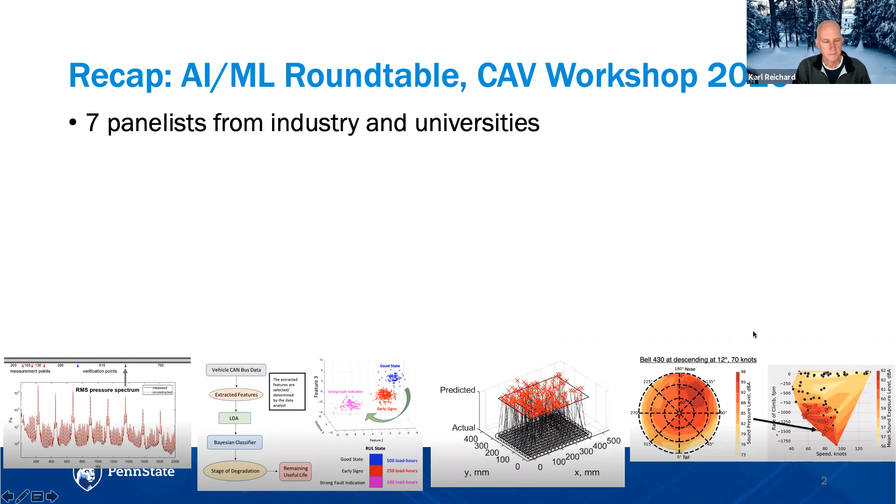Go ahead, Danny. Yeah, I can go from here if you want. So we had these panelists and we presented a lot of recent machine learning work on acoustic and vibration. Some of these are from our colleagues - the lower right is from Eric, and I'll get one from Dr. Dare, and also I think one is from Dr. Reichard here.

Anyways, we had almost unanimous consensus that we need to start a machine learning group, and we need to address some key challenges now in this field - that we want to incorporate physics and all these fancy data models to get a robust and explainable machine learning model that can be used robustly in industry.

This also connects to the questions that arise from this roundtable - questioning whether all these fancy data models are applicable to solve real problems in industry. In parallel, we also had discussions on what we should train or develop for the students to prepare them for industrial work, where we need them to get both the math and the hands-on skills and so on. This ends up with the essential needs that we identified.

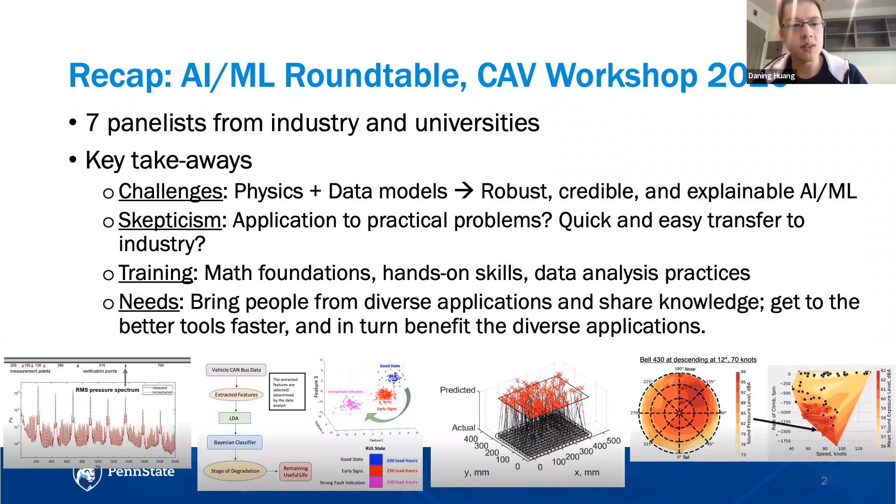As Karl said just now, we want to bring people from different applications in acoustics and vibration, and get people working together to solve problems that are probably challenging in real industrial scenarios, and solve them together.

And to do that, we will leverage a broad spectrum of machine learning methods, starting from the more conventional supervised learning to more recent network theoretic or operator theoretic methods, and also more advanced concepts like active or reinforcement learning and things like those. But in the end, we want to be able to solve the traditionally challenging problems in acoustics and vibration in realistic industrial scenarios.

Based on these motivations, we have listed our current research topics of interest, which range from reduced order modeling of very complex multidisciplinary systems to information fusion and decision making based on, for example, health monitoring systems. Of course, as our group grows, I'm sure our topics will continue to evolve and expand.

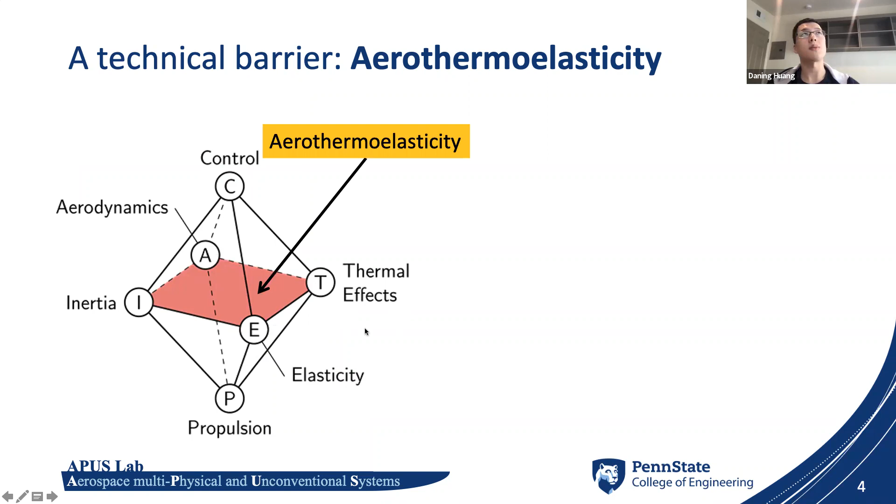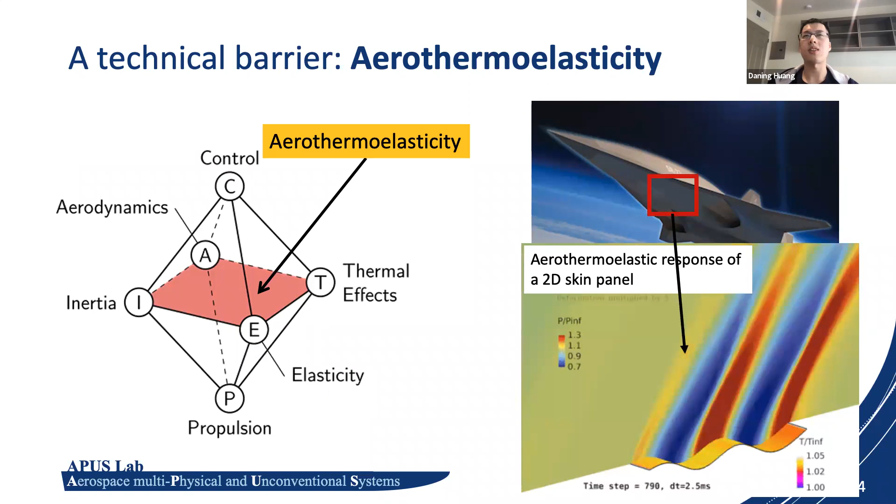Yeah, here's just one example of what might happen for aerothermal elastic behaviors. Here is the Lockheed Martin kind of design of the vehicles. If we look at the surface, just the skin panel for example, down in the lower surface, the panel might heat up and it might buckle and might enter some unstable behavior called flutter. And if this happens, it will be really, really dangerous because the structure might just break and the entire aircraft will crash.

So there comes our need for stronger and lighter structures. And here's a figure showing the thermal design considerations of the structure. For example, just now we are looking at the external skins.

So as we increase the cruise Mach number, we'll see that this structure will operate in the range of 1,000 to 1,500 K. I know the unit is K, so it's slightly more severe than Fahrenheit. You can imagine what would happen for a structure when it's like 1,000 K. It will be thermally expanded, and sometimes more severe behaviors on the material might happen.

And furthermore, if we look at the inlet for the engine, it's even more crazy. We are having temperatures that might reach 2,500 K. This is even maybe beyond the limit of some materials, the best materials that we have for the thermal environment.

And then what's the result for these thermal effects? Probably many of you know this X-15, this classical configuration that NASA has been playing with. It has been tested over a wide range of Mach numbers, and what people have seen is that there are so many destructions or malfunctions due to the thermal effect.

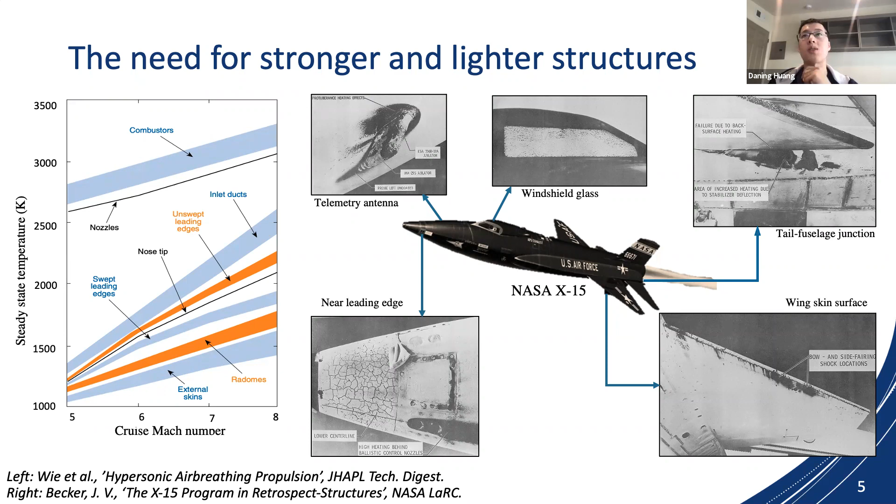So this is our basic challenge in the aerothermal elastic design of hypersonic structures. So then what are the challenging parts for the aerothermal elasticity? Well, first of all, we of course will have three components: the fluid, the thermal, and the structure part.

And the first part, the fluid part is apparently very challenging, as you might imagine. Here is one example of some recent work that I'm doing with the Sandia National Lab, where we try to analyze a control surface that's exposed to hypersonic flow.

And you can see there are many complex flow phenomena, like we have a shockwave boundary layer interaction at high speed. We have a boundary layer transition that's a totally different animal from the case of subsonic or supersonic flow. Besides these, we also have things like a real gas effect, where as the gas heats up, the molecules might dissociate and be chemically reacting. That adds a totally new dimension in the aerodynamic analysis in this process.

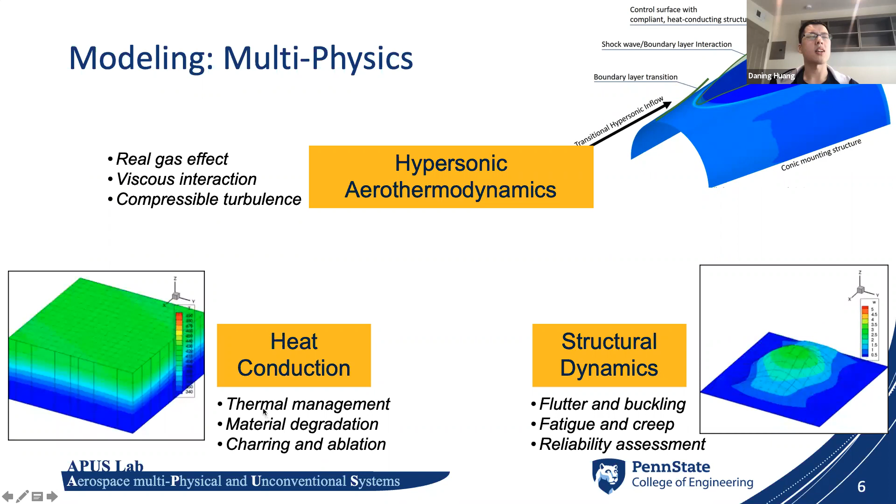And similarly, we are having different kinds of challenges in the other physical domains, which are themselves also quite challenging to tackle. Besides all these complex phenomena, we are also having this interaction between these physics. That way we have a complex multi-physics problem. Again, that would be rather challenging.

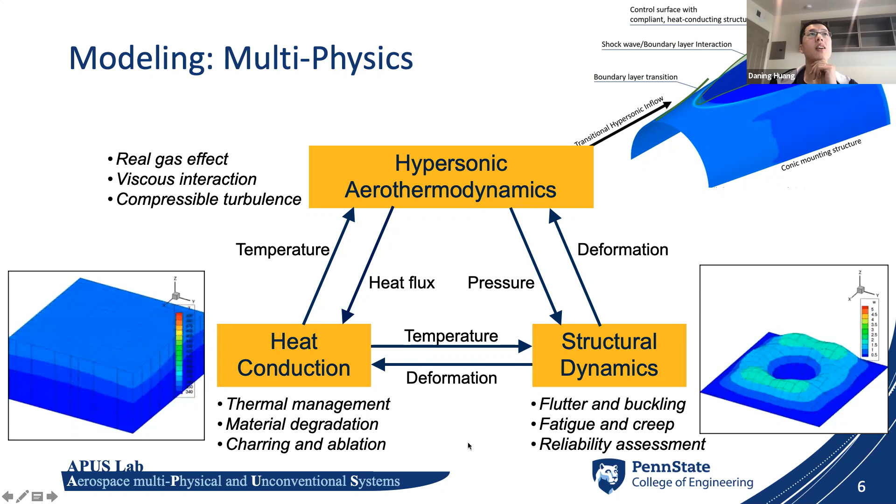Now, besides this multi-physics effect, we also have this issue of time scale disparity. What we mean by this is that for the three physical disciplines that we are talking about, they have very different characteristic times. And if you do numerical simulation, you probably know that if we do the simulation in the unsteady sense, then we need to determine the time step size depending on the characteristic time.

So for the fluid, our time step size needs to be like 1 millisecond. However, for the thermal case, we actually only need to do the simulation at a time step size of 1 second. However, for the hypersonic vehicle, we need to consider the entire flight mission, which might last for an hour or half an hour, which would correspond to like 1,000 seconds.

So this means that we need to resolve the fluids at a scale of 1 millisecond, and we need to do that for 1,000 seconds. And this really poses some intractable computational cost.

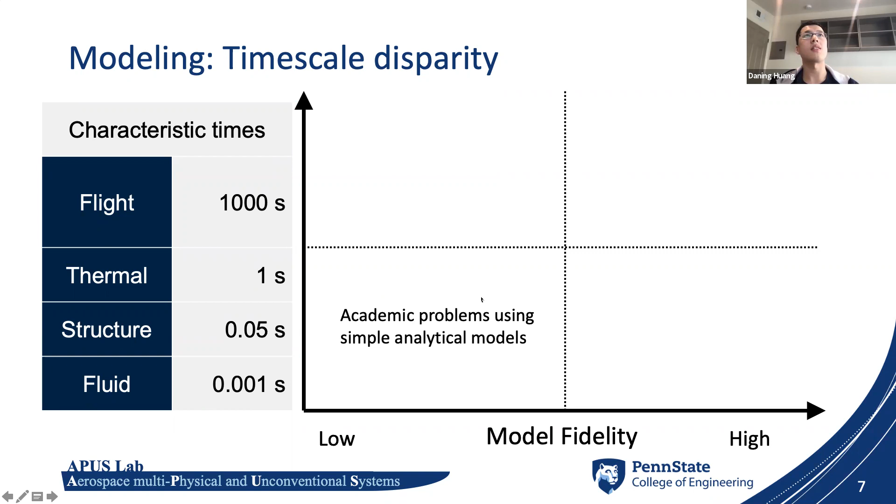And here is some just background on what people are trying to do. People might just use low fidelity models to do this long-term simulation, but this can lead to very wrong results, as was shown in some of the work 3 years ago.

Or we can do some very transient analysis, but we can never bring this up to a level of flight region. So here comes, if we really want to do this brute force simulation using high fidelity models over a very long time, then we'll have this challenge that we would need 1 million steps to resolve the time domain. But for each time step, since we have a very complex fluid problem, it will take a long time for each step. This will add up to weeks or months to do the simulation.

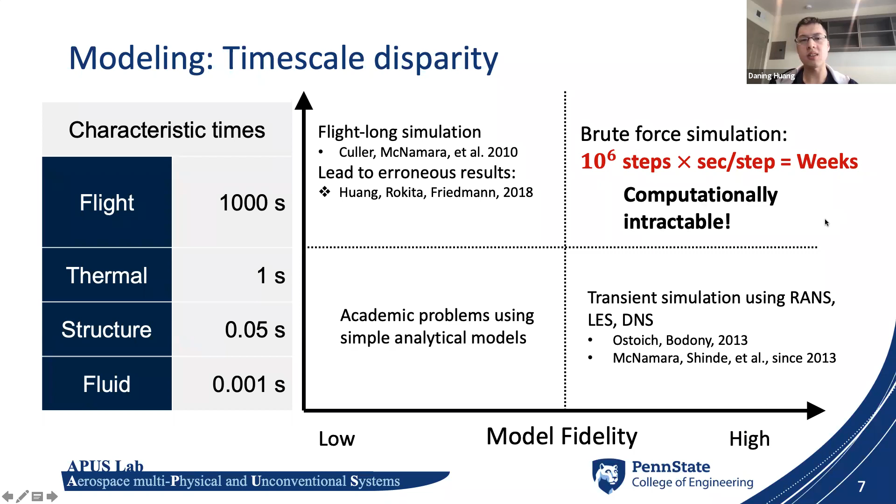So this is a basic challenge in the aerothermal elastic simulation, analysis, and design for hypersonic structures. So the natural thought would be we can somehow accelerate the aerothermal elastic simulation, so that we can perform the analysis faster, and hopefully design the hypersonic structure in a tractable computational cost.

So just now we identified that there are two components contributing to the computational cost. One is that we have too many time steps. The other is that we have too much computational cost for one step.

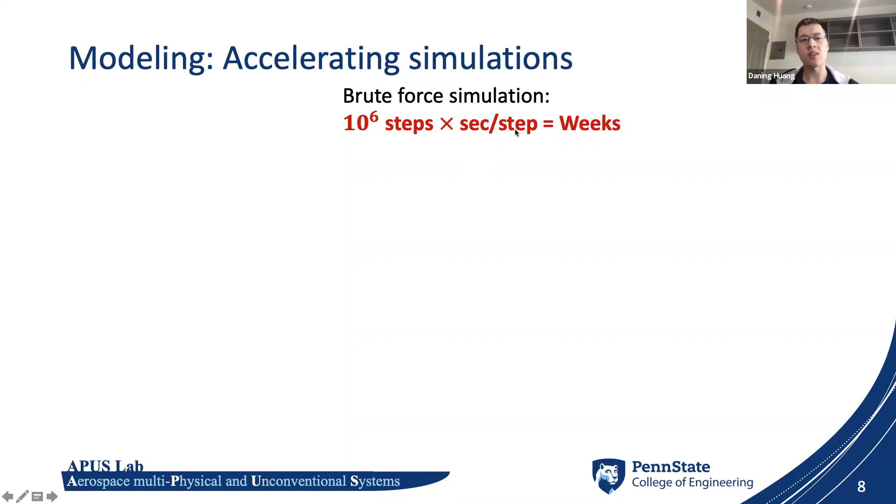People have been tackling these two sides separately. One is to use more efficient time step coupling schemes to reduce the number of time steps. The other is to use machine learning techniques to accelerate the computational cost for each step.

I'm not going to talk details about the left part, which is more on the numerical computation side. I'm happy to talk if you are an aeroelastician or work on FSI after the seminar. We'll mainly focus on the right part, on how we accelerate the computational cost of the fluid solver such that we can perform the simulation in a realistic time.

By acceleration, we mean accelerating from seconds or minutes down to milliseconds, like maybe 50 or 10 milliseconds.

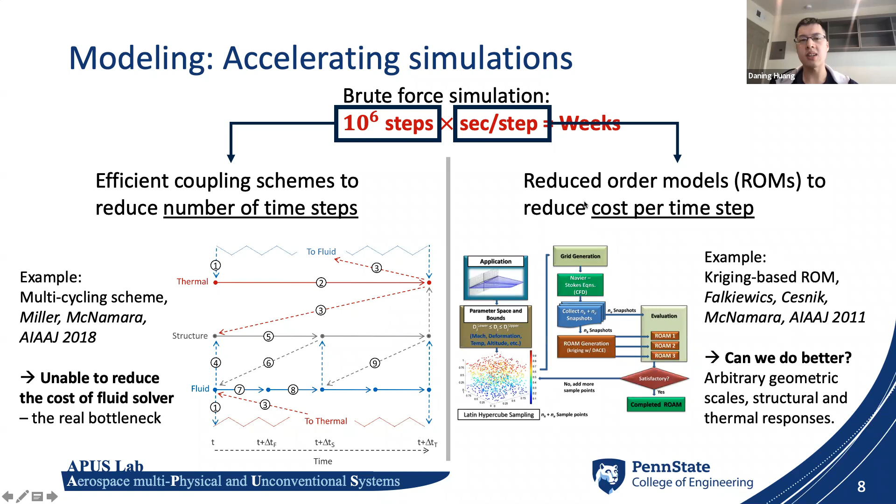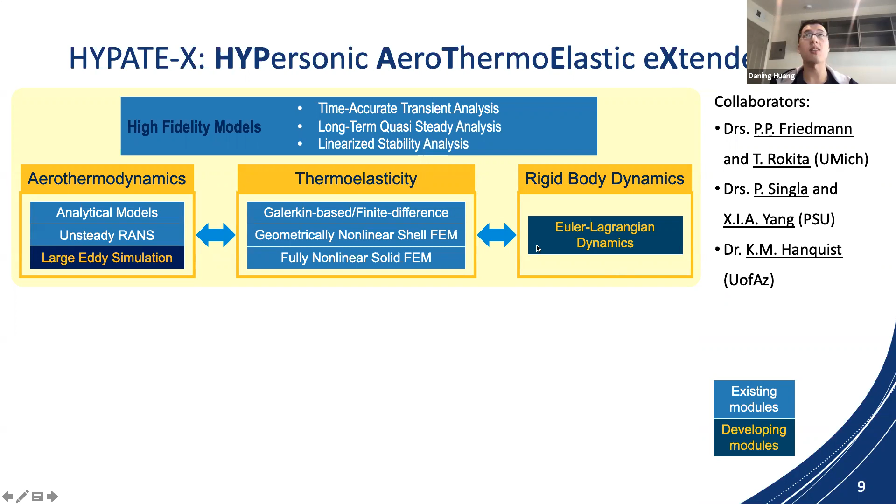Over the tackling of this problem, I have developed this HYPATE framework. Actually, I think now it should be called HYPATE-X for extended, because over my doctoral study I developed the models, as you can see in the white words, and now that I'm at Penn State I'm developing more modules for this framework, so it's gradually getting more extended.

Here I need to acknowledge my collaborators, like Dr. Singla from my department, where we focus on the lower right part on thermoelasticity modeling with reduced order modeling, and Dr. Yang, when we focus on large eddy simulation to enhance the fidelity of the problem, and also Dr. Hanquist, who we try to incorporate more complex fluid physics with.

I will be talking about one part of work with Dr. Hanquist in the second part of my talk, but today we'll be focusing on this lower left corner on the reduced order models for the aerothermal loads in hypersonic vehicles.

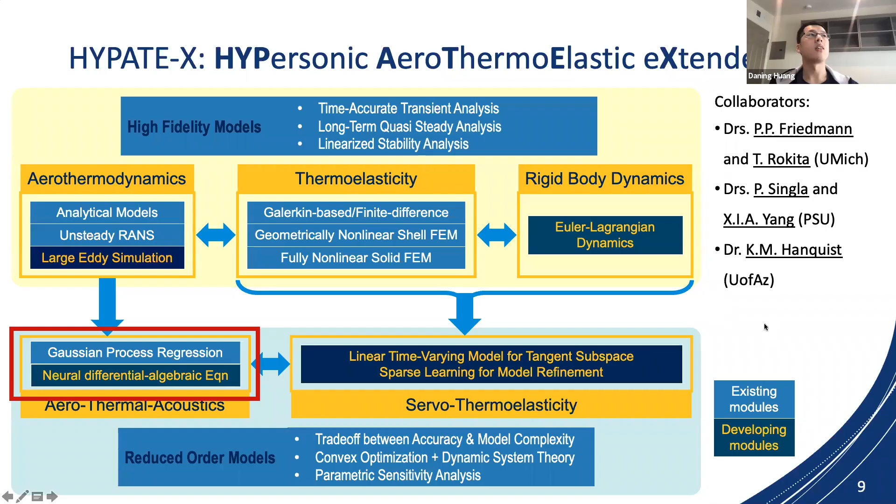My work in machine learning is more driven by the needs in different engineering analysis problems. For the first part of my work, this was done about two years ago, when we needed to design the scaled test models for aeroelastic structures, such that we can test it in the wind tunnel.

In this process, I developed some general techniques that can extrapolate an interpolative model. What do I mean by that? We'll see that in a minute.

First, let me explain what I mean by scaled models. If we think about the subsonic case, where we look at a commercial jet and want to test its aerodynamic properties, we probably want to put it in a wind tunnel. We scale it down and let the wind blow in the wind tunnel, and then we'll get the lift and moment coefficients that can be converted to the full-scale model. This can be done relatively easily because we know the scaling laws, namely the necessary similarity parameters to match.

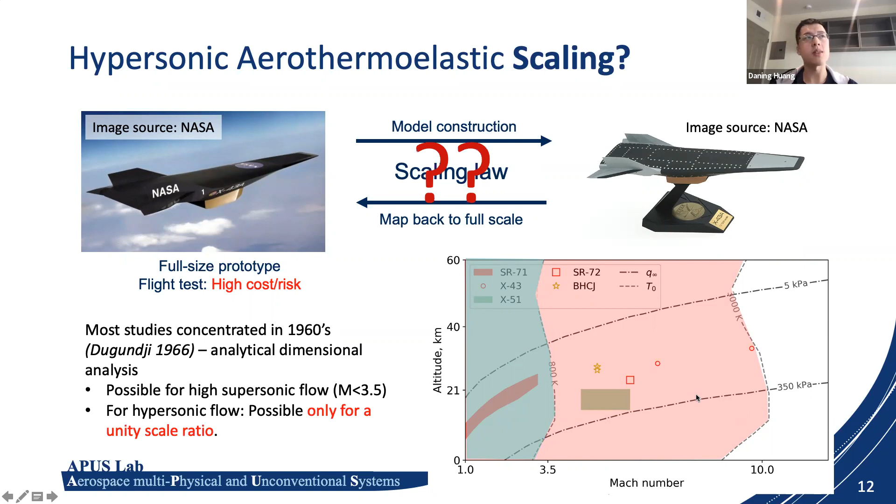So that means if we want to test a hypersonic vehicle, then we really need to build such a vehicle and fly it in the atmosphere. This is really risky and very costly, and it also takes a really long time. Actually, this is one reason why we are still not seeing real hypersonic vehicles flying in the atmosphere.

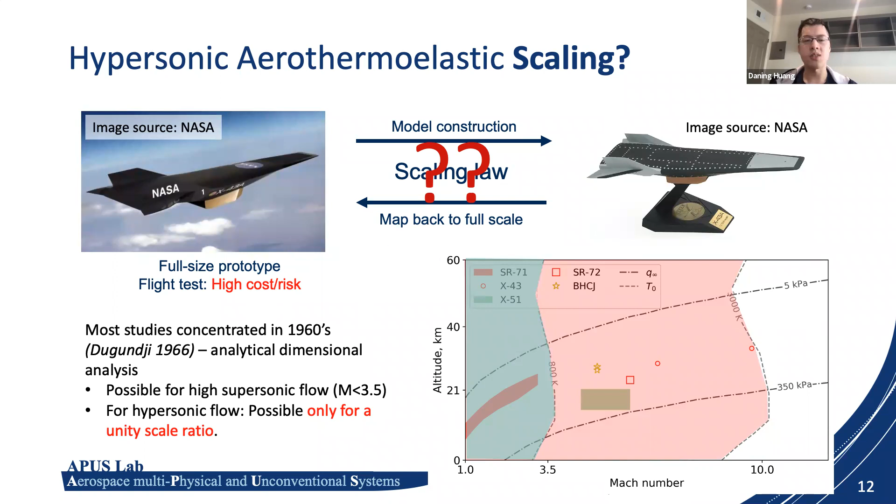So here is more like an attempt to say that we actually can scale down the vehicle so that we can test it in the wind tunnel and get reasonable results that can be scaled back to the prototype. This way, we can save the cost and reduce the risk for hypersonic vehicle development.

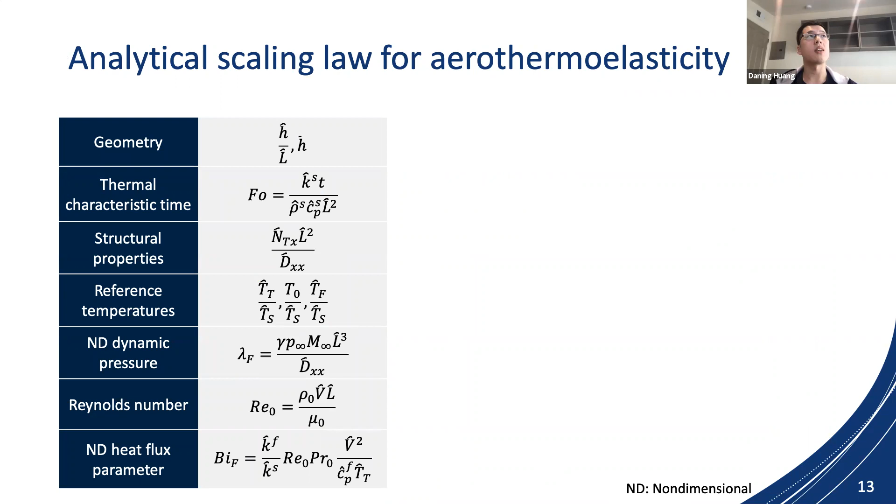Here are some more details on why we cannot do the scaling law for aerothermoelasticity, but I guess I'll skip this part. These are just some maths showing that we have similarity parameters that conflict with each other, giving us different flight conditions for different kinds of similarity we are interested in.

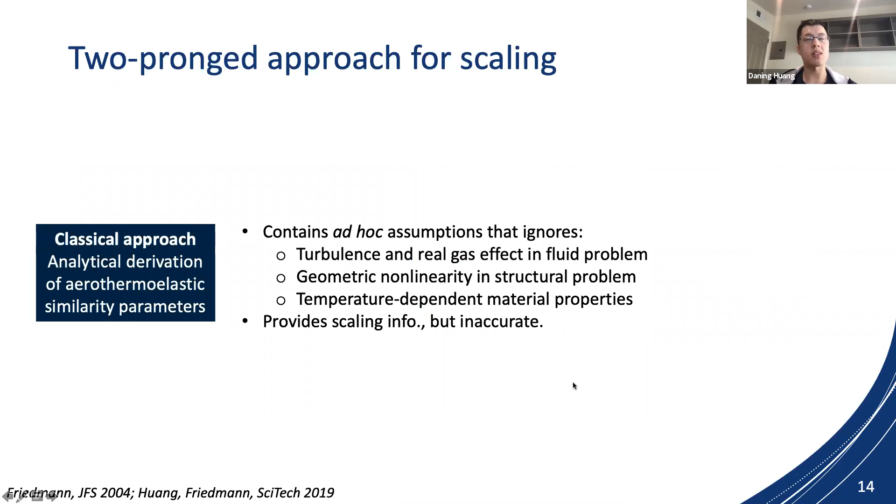To mitigate this conflict in the similarity parameters, we developed a two-pronged approach for the scaling. Namely, we want to design, we pose the scaling as a design problem. The idea is to design the structure such that it has a similar response when compared to the prototype structure. If we are able to obtain two models that behave in a similar manner, then we can consider that we've found the scale model. This comparison is done in the computational sense.

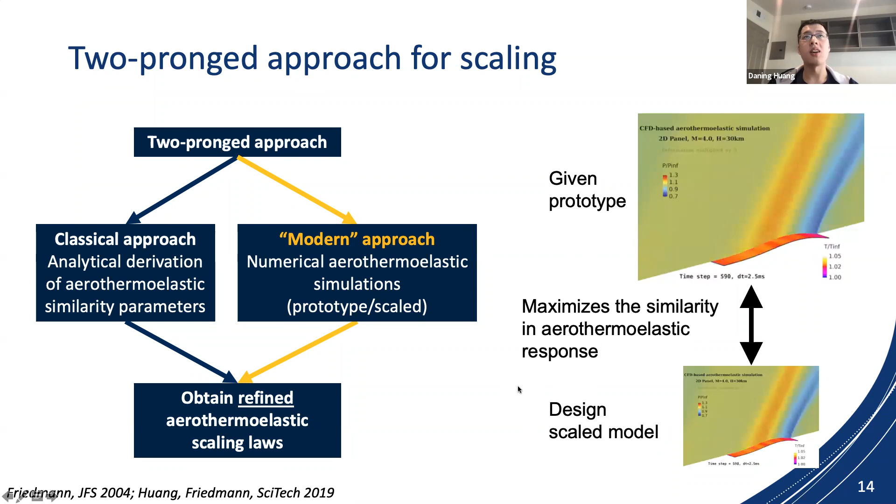Then there's only one issue that's left. Here we are talking about design. We would need to try a lot of different configurations for the scale model. But to do that, we will need a lot of computational simulations, which, as we discussed, is really intractable. So we need to accelerate the simulation to enable this kind of design approach, and this is where machine learning kicks in.

So I'll start with a conventional approach for how we accelerate our aerodynamic solvers. For our coupled physics, we are more interested in treating the aerodynamic solver as a black box. We put in the deformation and the temperature from the structure, and then the CFD solver will do some work and return the pressure and the heat flux.

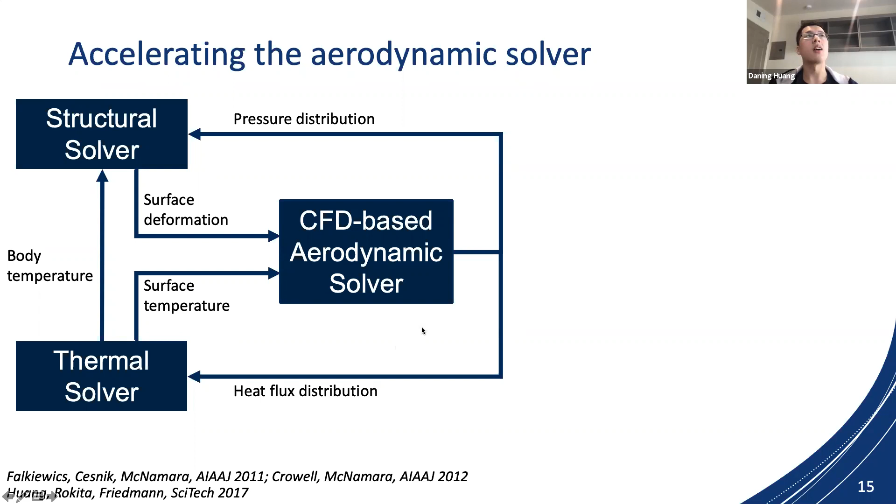In this process, we can just replace the black box with a certain reduced order model or a surrogate model, depending on what's your definition of a reduced order model.

And then how we construct this reduced order model is straightforward. We produce the input, which are the surface deformation and the temperature, and then going through this black box, we'll get the pressure and the heat flux. Now, what's in this black box?

It's just an interpolation between some pre-computed CFD sample solutions. These solutions are generated for different combinations of deformation and temperature. So if we want a new deformation and temperature, we can put it into this interpolation model, and we'll get the new pressure and heat flux for these new structural states.

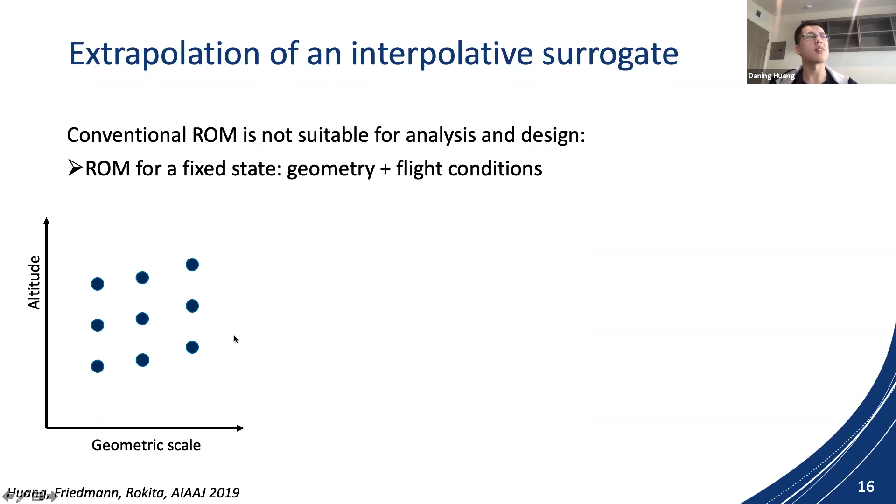But then there is an issue. For this process, we need to do a lot of pre-computation, and this has to be done for a fixed configuration. This is really inappropriate for design because when we do the design, the geometry of the structure will for sure be changing. It's really impossible to generate a new ROM for every new geometry we want to consider. If we do that, we will need a lot of computations for each of these combinations, and this is intractable.

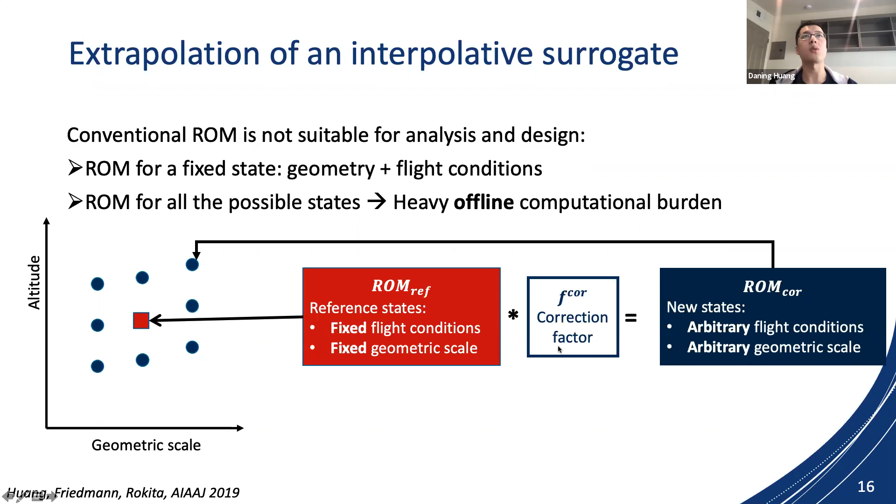So what we have done for this part is introduce an extrapolation technique based on a mixed fidelity formulation, where we start with our reference reduced order model generated for a certain geometry that we are interested in. Now, suppose we want to get the ROM for a new state that might have a different geometry. We introduce a way to correct it, and this correction factor is approximated using a low fidelity model that can be computed analytically in a very efficient manner.

And actually, this approach is very generalizable to many other different engineering problems, as long as we have a low and high fidelity model that we can mix.

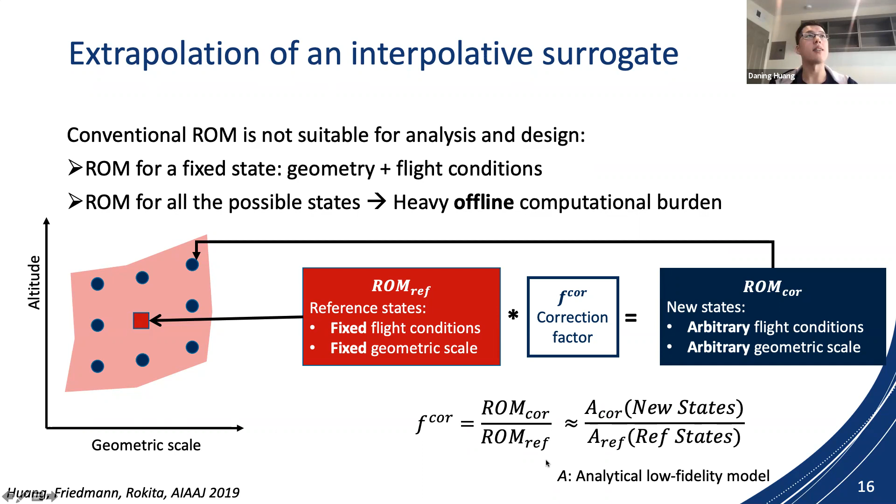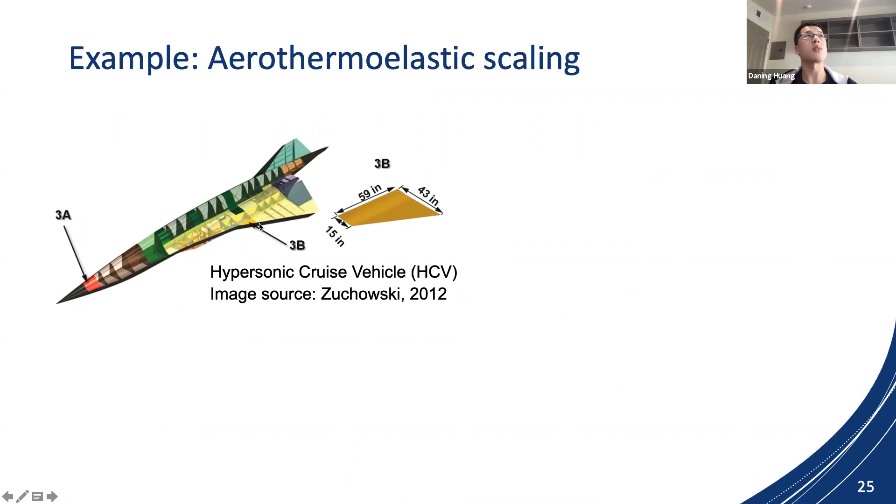So here I skipped quite a bit on how we actually do the design optimization, which is based on Bayesian optimization. We'll jump to this example, where we look at a nominal hypersonic vehicle, and we are supposing that we want to scale a certain structure on the surface.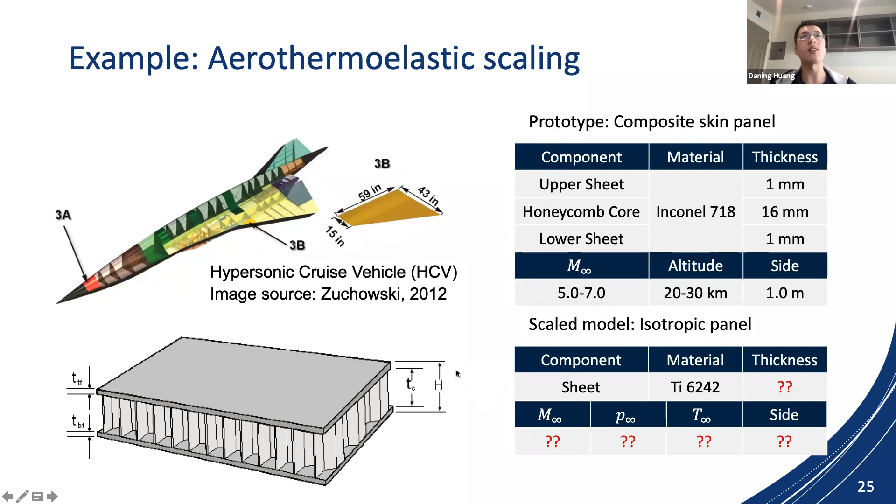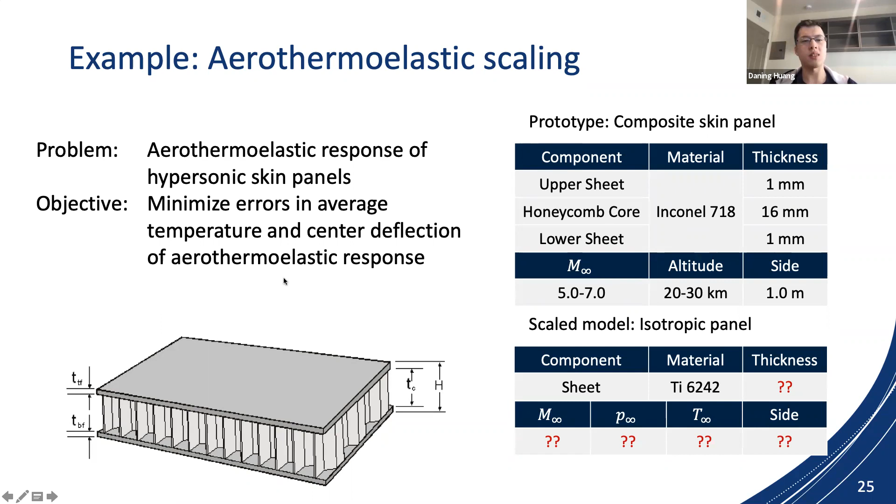To be more specific, we took a composite skin panel where we have the honeycomb core in the middle, which is for thermal insulation. We wanted to design a scaled model, with a uniform material, such that the panel behaves similarly to the actual skin panel. So we want to minimize the errors in the temperature and the deflection of the two models.

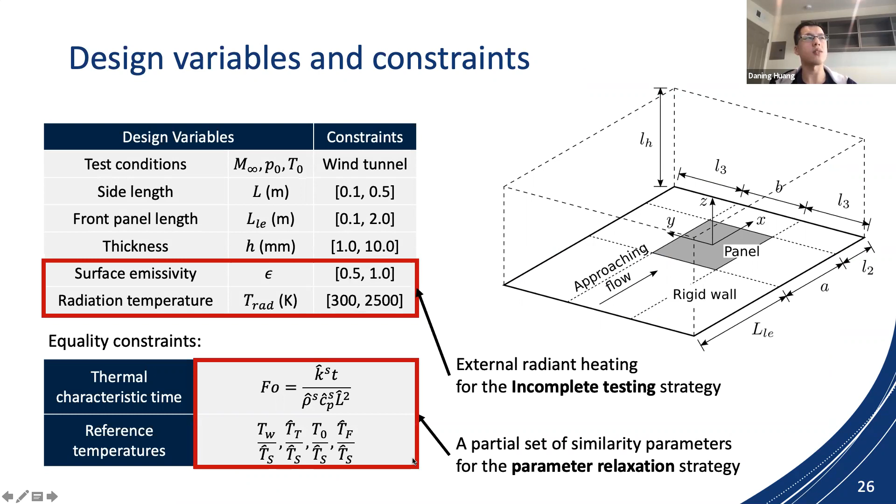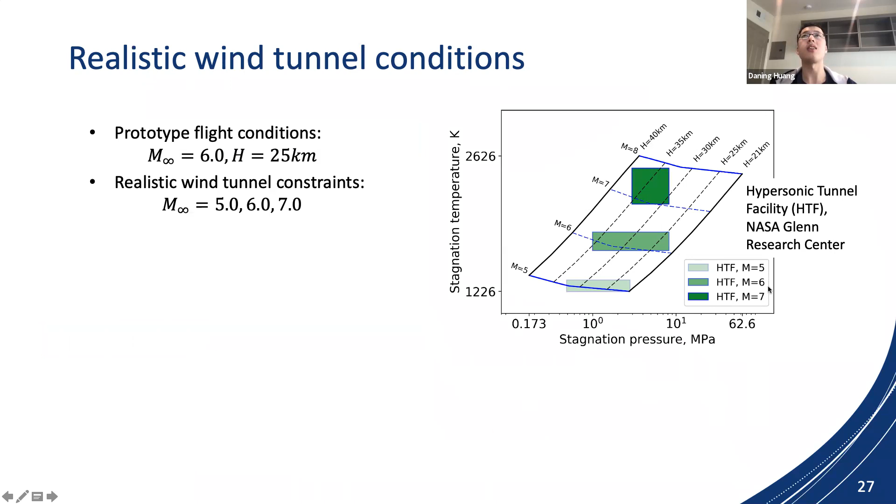So here's the configuration we are looking at, the computational domain. Then we have these different design parameters and also the constraints that we want for matching the similarity. And here is the wind tunnel that we assume we are looking at, the NASA Hypersonic Tunnel Facility.

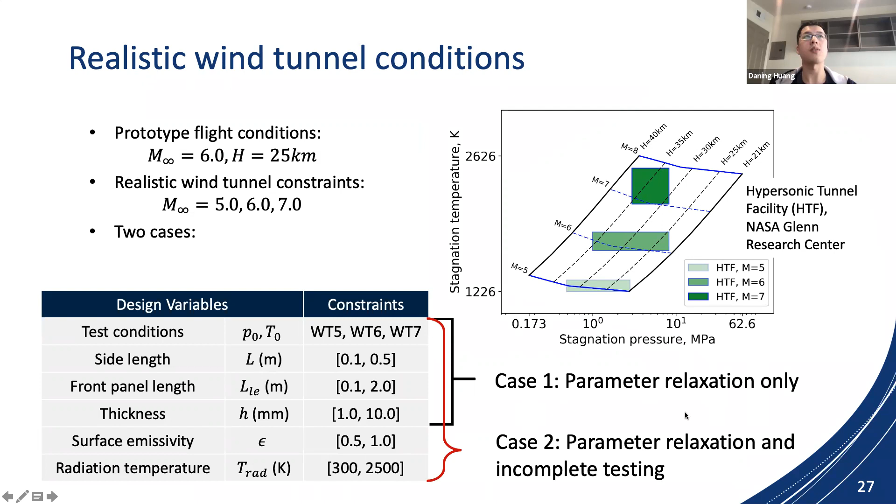And then here are just two cases, one with an extended set of parameters that we can play with. So here I'll just show you how the design works, or the effect of the work.

So in the first case, we are designing with a smaller set of design variables, and unfortunately we cannot really match the aerothermoelastic responses. Here the dashed line is a scaled model, and the blue line is a prototype. As you can see, in both cases, the error is super large.

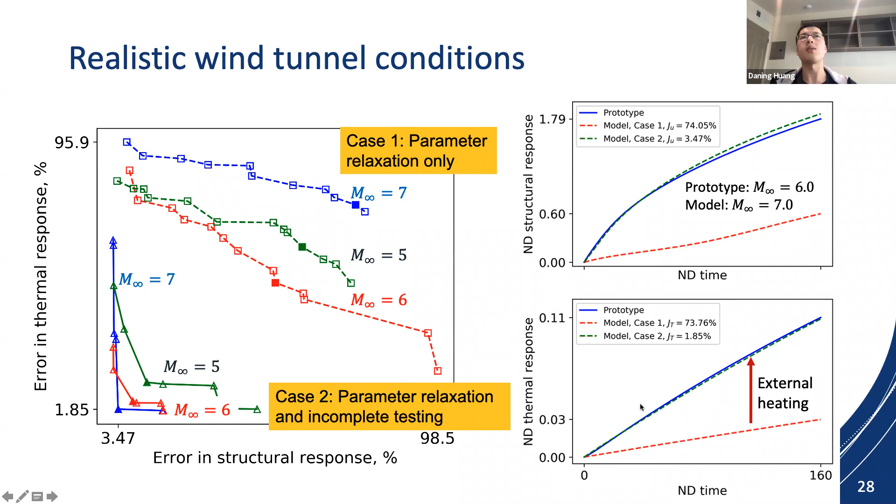We can never consider this to be a properly scaled model for wind tunnel testing. Then we consider a different case, where we expand our design parameter space, and something amazing happens. We are able to correct the scaled model response such that it is almost similar to the prototype response. That way we can claim that we actually enabled the aerothermoelastic scaling that was not possible before.

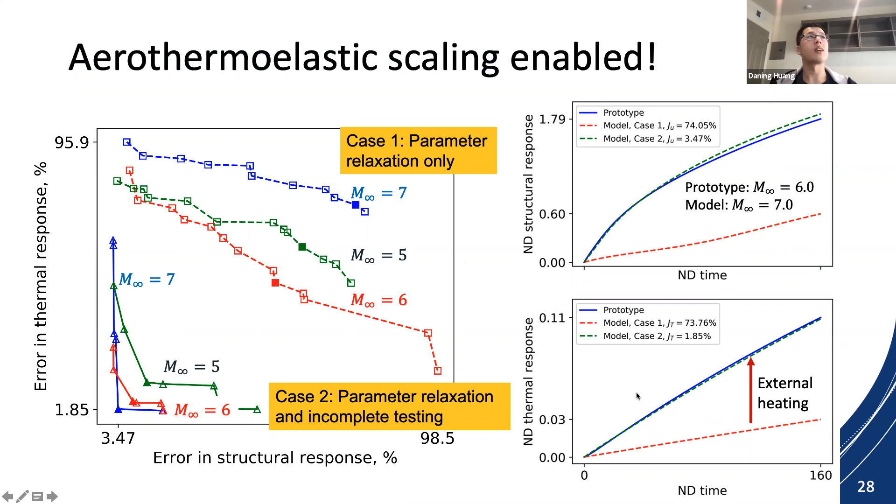And this concludes the first part of the work that I want to present here. Now it comes to the second part.

One issue in this first part was that we were more or less considering a very simple gas model for hypersonics. But in reality, we'll get a very severe issue with what we call the high temperature effects in the gas.

And this might have a very significant impact on the aerothermoelastic response. This comes to our second technique that we have to develop over this process, where we introduce a multi-fidelity surrogate for the aerothermal modeling.

So we come back to this figure again, and just as a reminder, in the first part we are mainly looking at this lower portion for the external skins. In this part, we'll be more thinking about things like the nose tip or the inlet ducts, which operate at much higher temperature.

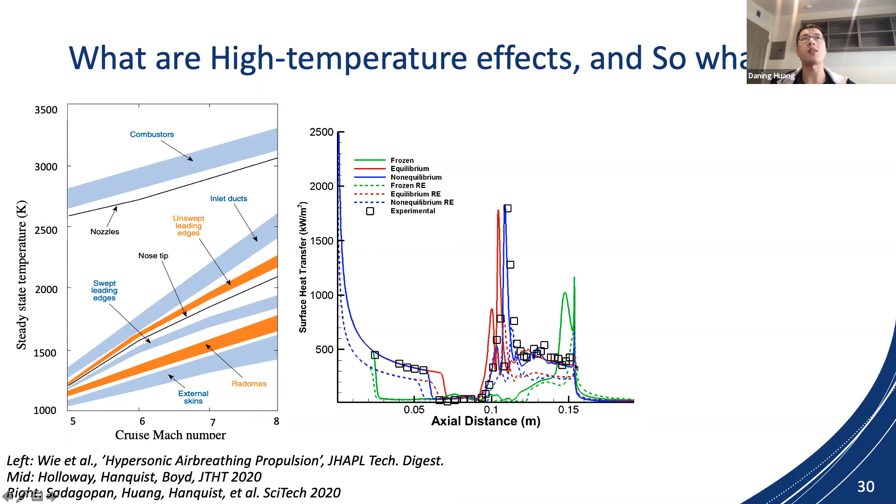We have to use a non-equilibrium model that captures all these heat flux, and then we can do the hypersonic structure design with confidence. It's really important to have the correct heat flux prediction when we do the hypersonic structure.

However, if we incorporate a little bit more higher fidelity result, then this trend is actually reversed. If you design with a low fidelity model, you'll get an under conservative design, and it's really dangerous if we really have that for the hypersonic structure.

So then, but then here comes an issue. If we really want to incorporate the high temperature effects in the aerothermoelastic design, then we really need an aerothermal fluid model that accounts for the high temperature effects.

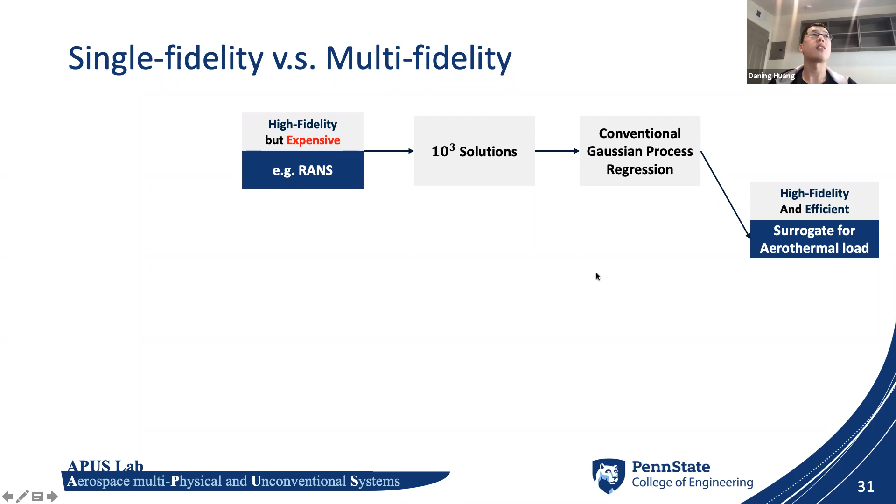When I collaborated with Dr. Kyle from Arizona, to our disappointment, we realized that if we really want to follow this conventional approach, then we'll never finish our research work. So then we come to the other approach.

Where we say, okay, what if we do this? We start with some very low fidelity models. It could be inviscid analytical models, or maybe RANS with regular gas models, which are easy to compute but with lower fidelity. We generate maybe 1,000 of these. Then we generate much fewer, maybe 10 or 20, high fidelity solutions. We use these to correct what we have for the low fidelity model.

So to do that, we need to do something we call multi-fidelity Gaussian process regression. The end result is still the same: we get an aerothermal surrogate that has high fidelity and is still efficient to compute. By efficient, here we mean one solution is done in like 50 milliseconds, while if we want to do RANS with high fidelity or high temperature effects, it might take maybe 2 days, and sometimes it doesn't even converge.

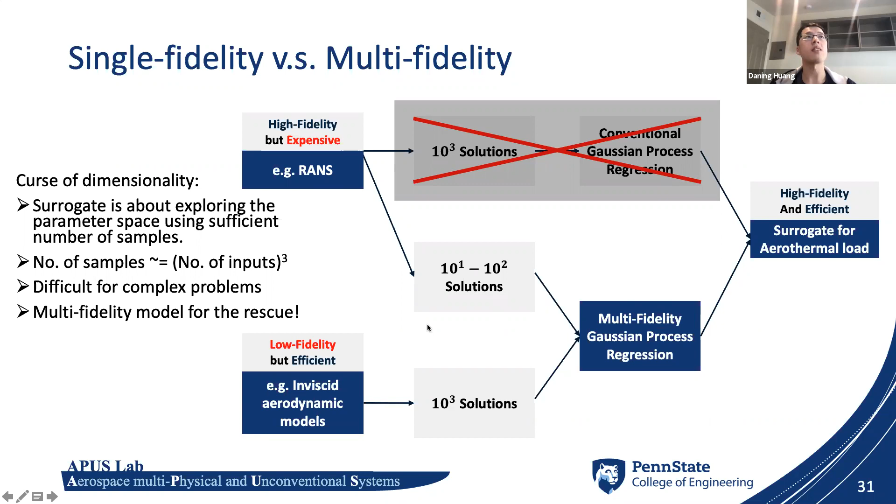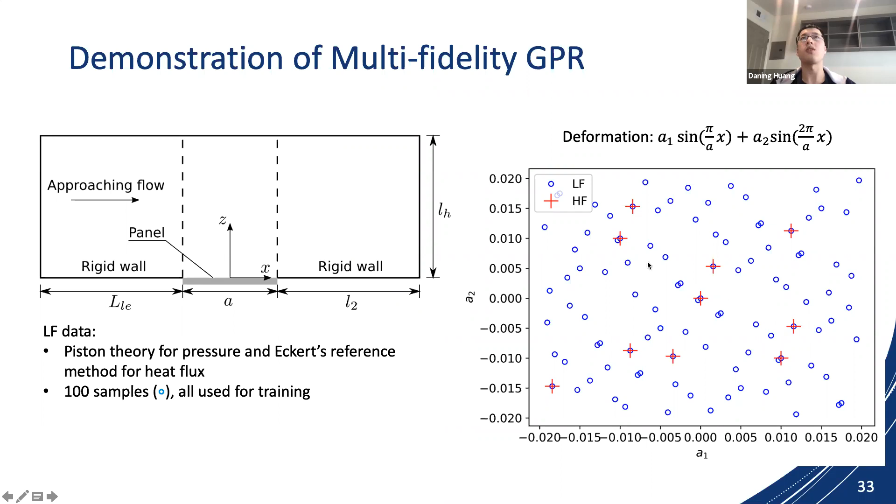For the low fidelity data, we consider all these blue dots and use them for training. Meanwhile, we also put in high fidelity data on the same spots, shown as dots and crosses. But we only use the red crosses for training, and all the rest of the 90 blue dots are used for testing.

So we are only using 10 high fidelity samples to try to predict the high fidelity solver's output. Here's the result: for all 90 test cases, the error is under 5%, which is really accurate.

Here we can look at two special cases. First, let's look at the blue one, our best sample. The low fidelity sample, shown as a dash-dotted line, is far off from our high fidelity prediction in the solid line. You cannot even see the blue dashed line representing the surrogate prediction because it's so accurate that it overlaps with the solid line.

And the worst case is also shown in red, where again, with the surrogate, we are able to correct the low fidelity model to match the high fidelity model.

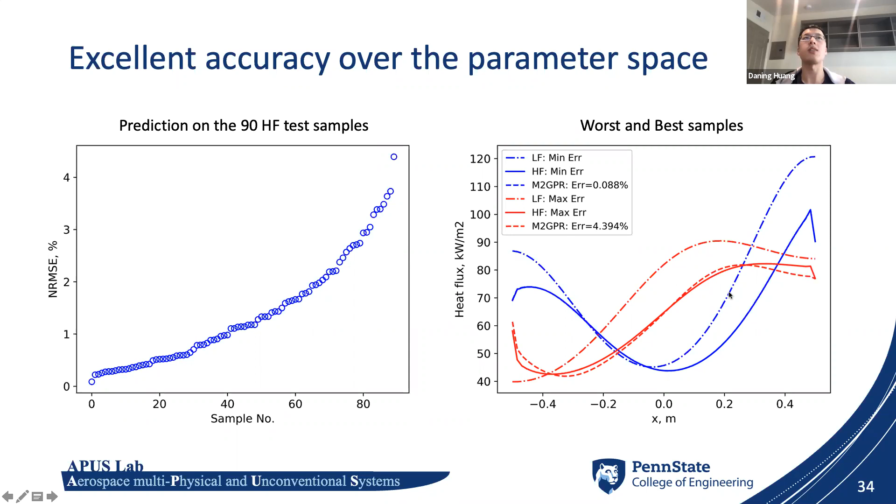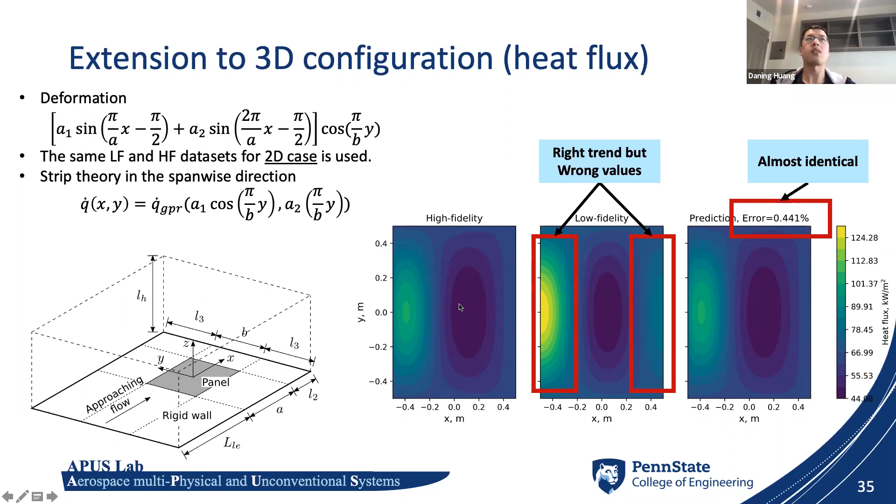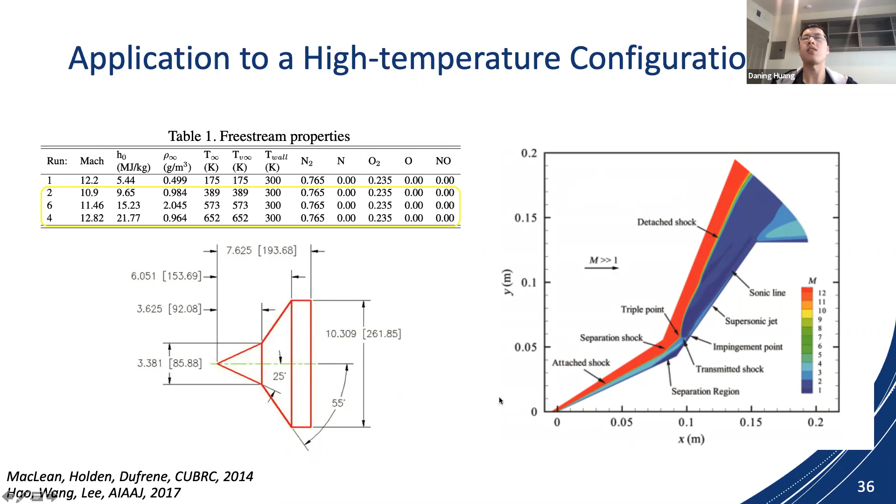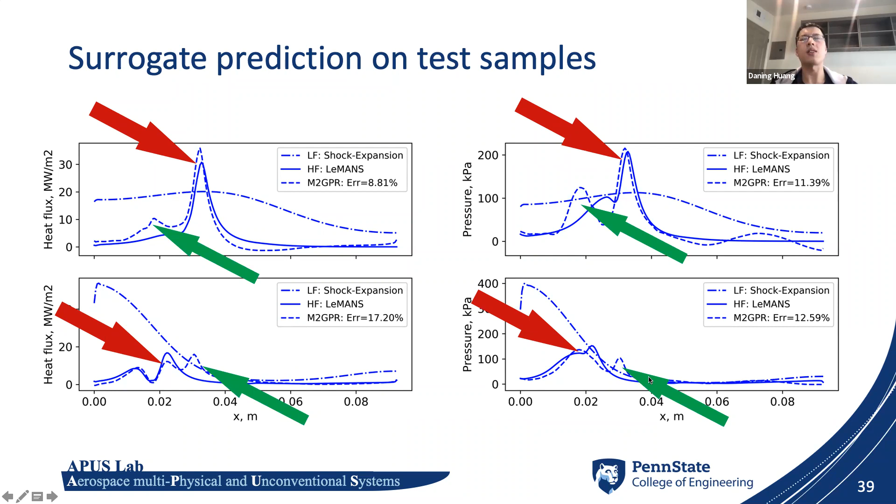Here are our predictions. The dash-dotted lines are still our low fidelity prediction, and they are totally off. Our surrogate is able to correct that wrong trend and capture the main peaks in the heat flux prediction. But we have to admit there are still some issues, with spurious peaks in the heat flux and pressure. This can be improved by adding just a little more high fidelity samples.

And here comes our case of aerothermoelastic analysis. On the left, it shows the deformation of the structure, and we also get the average wall temperature for the structure. The analysis shows that if we don't care about the wall temperature distribution, it appears the panel will fail at about 278 milliseconds, which is when it reaches its service temperature. By the way, here we are looking at the experimental configuration.

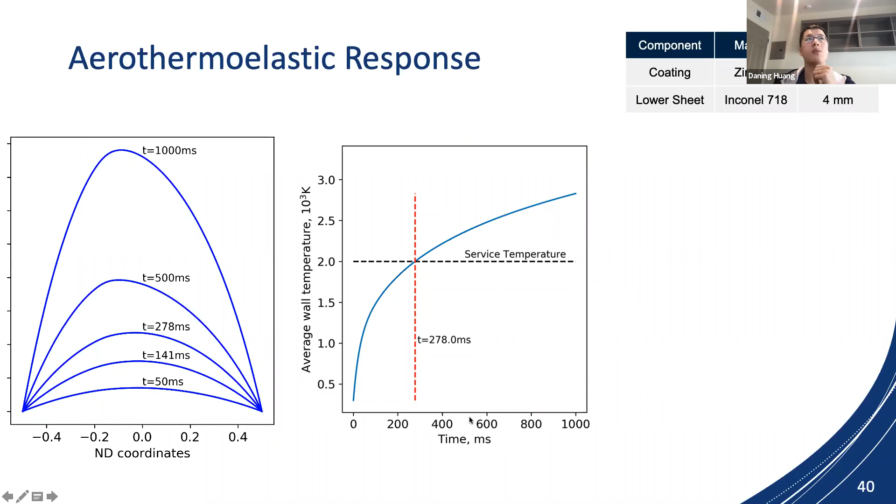So it's really unreasonable to have such a short time frame for the panel to fail. But the methodology can be applied to more practical considerations.

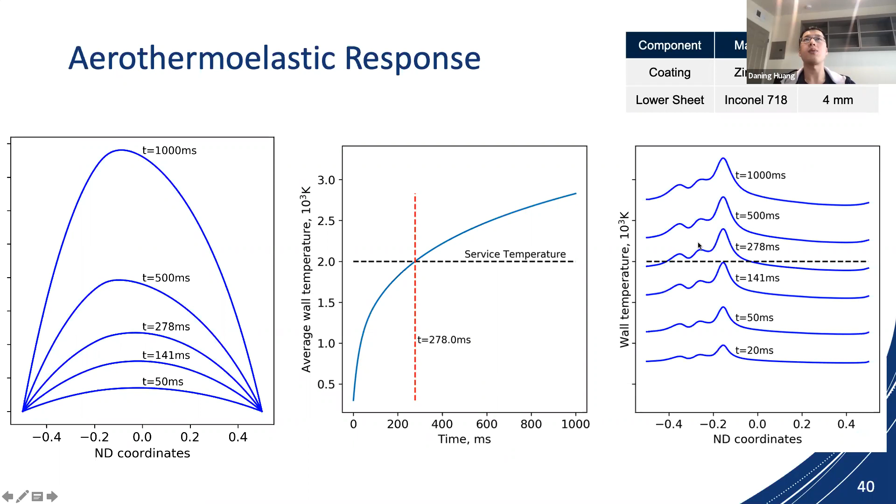But if we look at the wall temperature in detail, something really dangerous happens. We have a very non-uniform wall temperature distribution. As a result, as early as 141 milliseconds, we are already reaching the service temperature, and the panel might fail about 50% earlier than what we predicted.

This highlights how important it is to capture the high temperature effects in the aerothermoelastic design of hypersonic structures. Again, these conclusions are enabled by the application of machine learning in the acceleration of the fluid analysis.

Now, finally, it comes to our last part. Over the course of the first two parts, I've been thinking we really need some efficient tools to design hypersonic structures that might have different arbitrary shapes or very complex structures. I'll show you what I mean by real structures.

Here is one configuration from a hypersonic vehicle where we have all these stringers attached to the plate. As you can imagine, as the panel heats up, we get very wavy structures where the stringer part deforms less and the panel part just bulges up. So the deformation shape will be really complex.

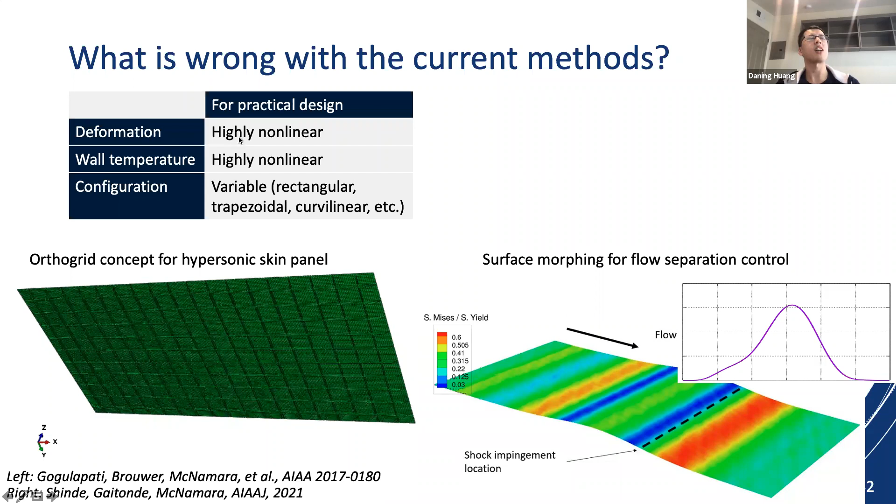So just to summarize, we have highly nonlinear deformation and wall temperature distributions, and we might be having very strange configurations or shapes of the panel. But for the methods so far, for the machine learning part, we can only consider a very simple sinusoidal deformation and a fixed shape of the structure, which is really impractical when we want to design something more realistic.

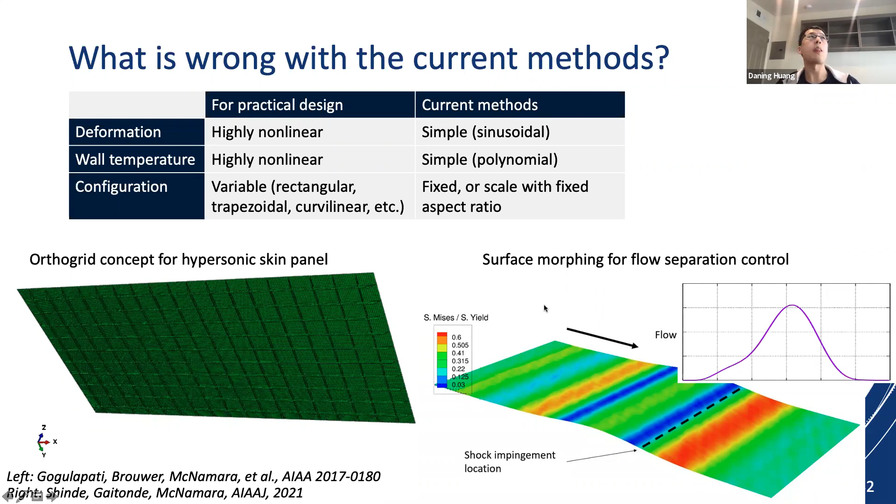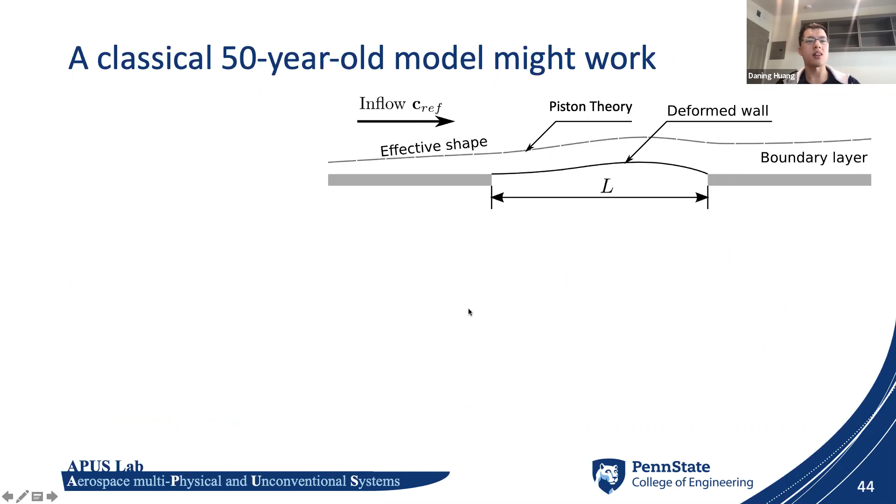So how do we tackle this issue? It turns out it's possible that we can just use or recycle a very old analytical model called the turbulence viscous-inviscid interaction. This is probably some textbook model that would appear in hypersonic aerothermodynamics.

The idea is very simple. We assume that the main stream flow is inviscid, as we would expect from the Reynolds analysis. Once we have the pressure on the boundary layer as well as the skin panel, we should be able to predict the growth of the boundary layer. Then from the boundary layer, we should be able to predict the pressure and the heat flux on a deformed structure, like on any deformed structure. So that is really good.

However, to get an equation this simple, apparently many physics are missing. For example, the high temperature effects that we were just talking about. So it is necessary to somehow augment this simple analytical model such that it can predict the quantities necessary to design hypersonic structure at an accuracy close to CFD solutions.

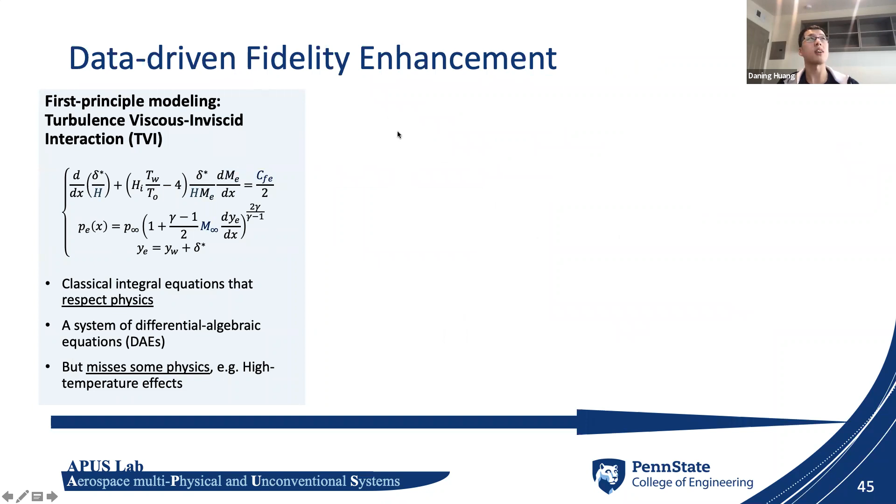So here comes our very new approach: fidelity enhancement through a data-driven approach. Forgive me for all the symbols here, but let's just focus on the colored ones, where H is something like a shape factor for the boundary layer.

It may not be that accurate, so we try to incorporate a correction factor. Similarly, for the skin friction, there might be some inaccuracies, so we get a bit more corrections here and there. With these new functions, which are still unknown, we are able to augment our system into a new system of equations with unknown functions.

Then we can do an optimization problem such that we find the optimal function forms for these corrections, so that our low fidelity model can predict as well as the computational, high fidelity computational or experimental data. This way, we are able to capture all the missing physics in the original model.

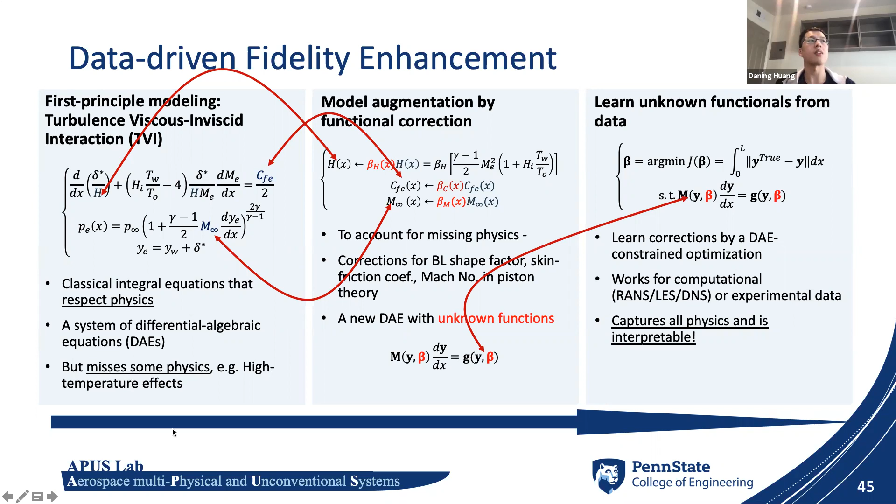So here is the detailed flow structure, which might be intimidating, but we can go through it step by step.

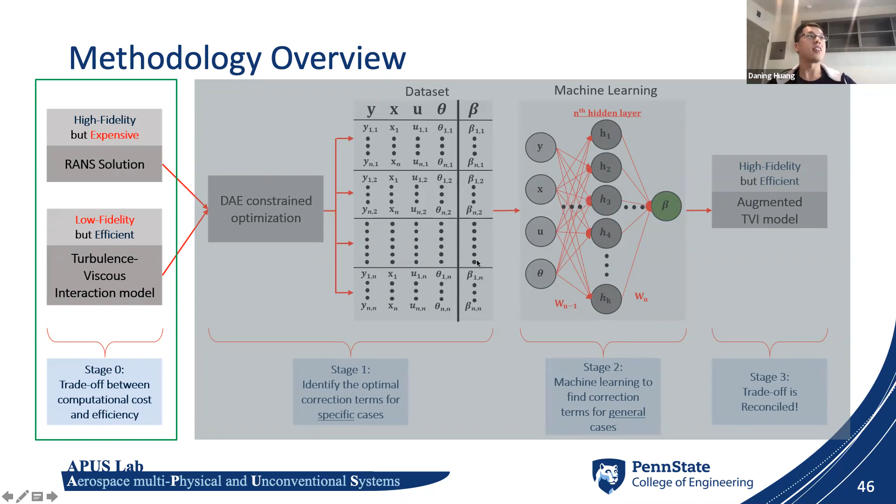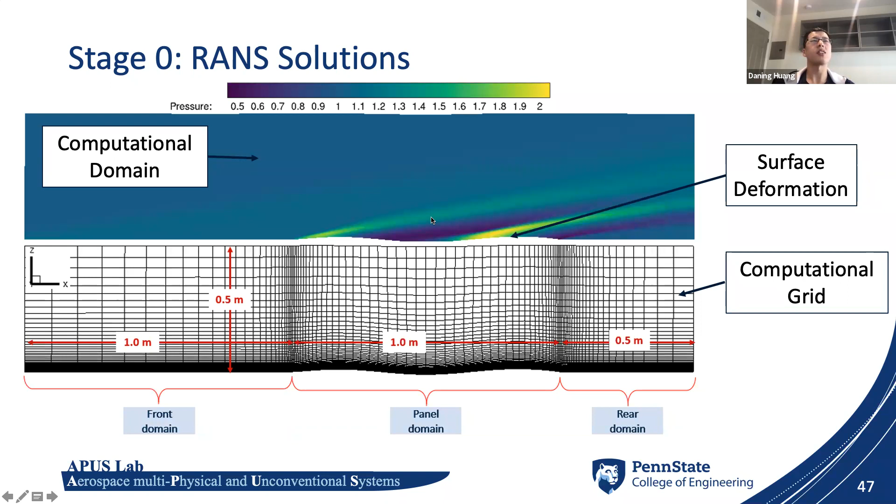So we'll start with RANS solutions, and then the RANS solution of a deformed structure, and then we have the deformation, and this is the solution that we want to match from the low fidelity TVI model.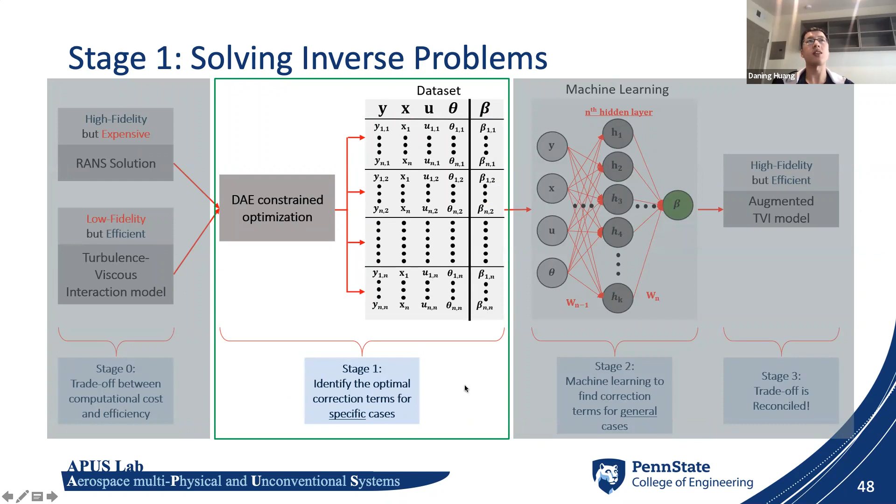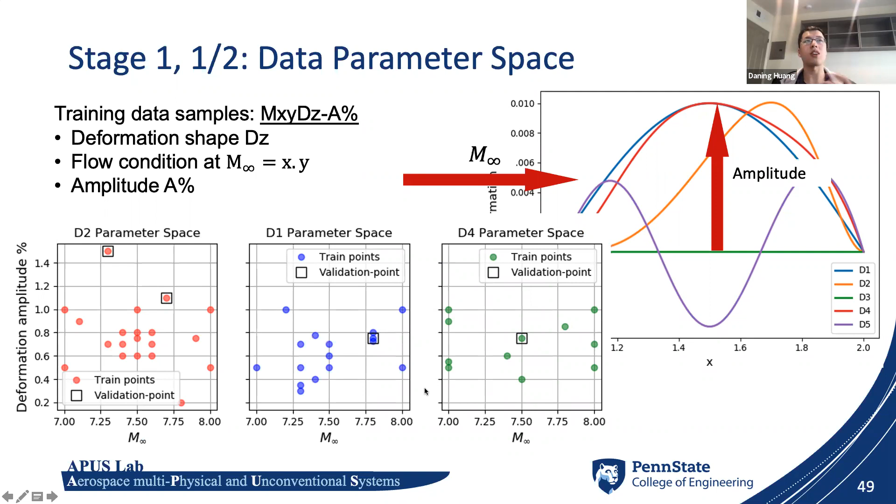And then we just want to do this constraint optimization such that we can find the proper correction terms for the cases that we have for the samples. We consider just a few samples here and there that have different amplitudes, different shapes, different inflow Mach numbers. These are quite sparse, especially when you compare to the earlier cases where we happen to have 100 or 1,000 samples.

And then we just do an optimization that minimizes the difference between the RANS result and our simplified model result by tuning the beta here.

And this is what we get. We have the deformation on the lower left, and then the beta correction factors optimized from the optimization. In the lower figure, it shows the effect of the correction from the TVI model, which is really inaccurate from the black line, and it's corrected into the red line, where it almost matches the black line.

And this achieves what we want. So once we have these, we collect the data. These are our training data, where we have the TVI solutions as the input and the correction factors as output, so that once we have such a model, we can transfer it to prediction on new configurations without knowing the high fidelity solution.

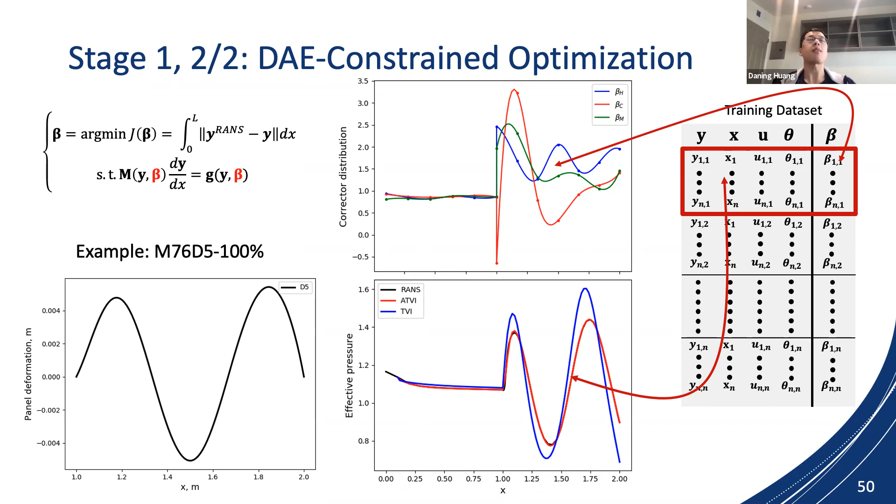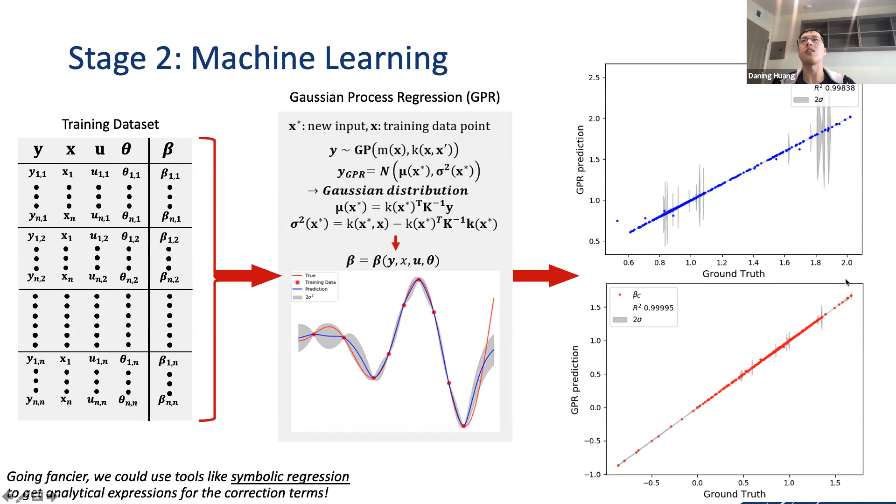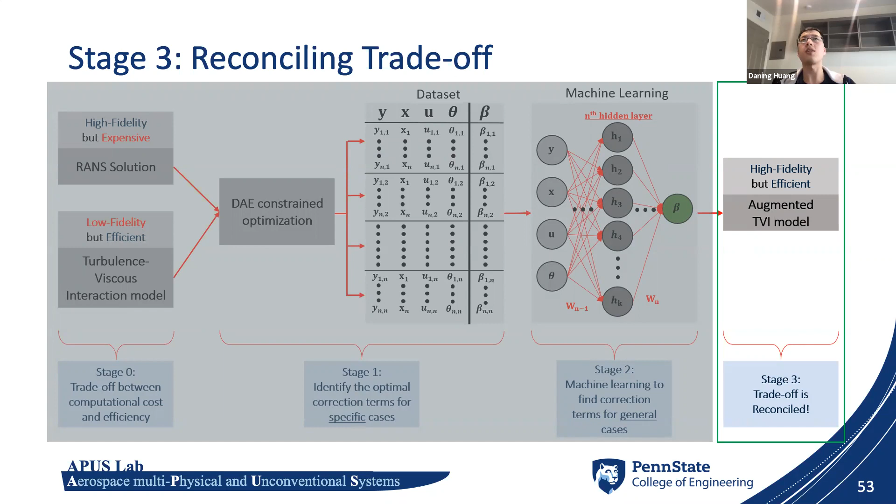So here comes the machine learning part, but it's just very simple. For enhanced interpretation of the uncertainty, we used Gaussian process regression, and the fit looks really great. With the Gaussian process regression, we can plug that into our TVI model as the augmented correction factor.

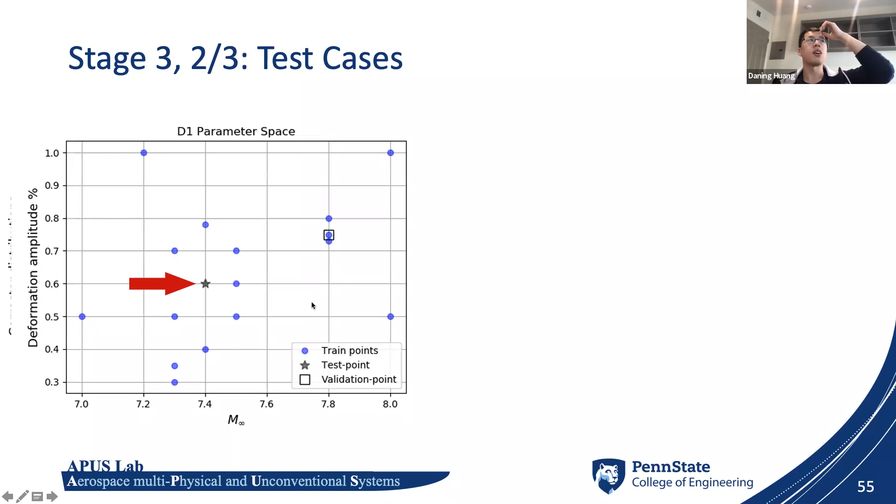So here are some examples. First, we look at a training case — actually, I'll skip this — let's directly look at a test case, a sample that doesn't appear in our training parameter samples. Here is our capability of the GPR-based corrections to enhance the prediction from the blue low-fidelity result to the black high-fidelity result.

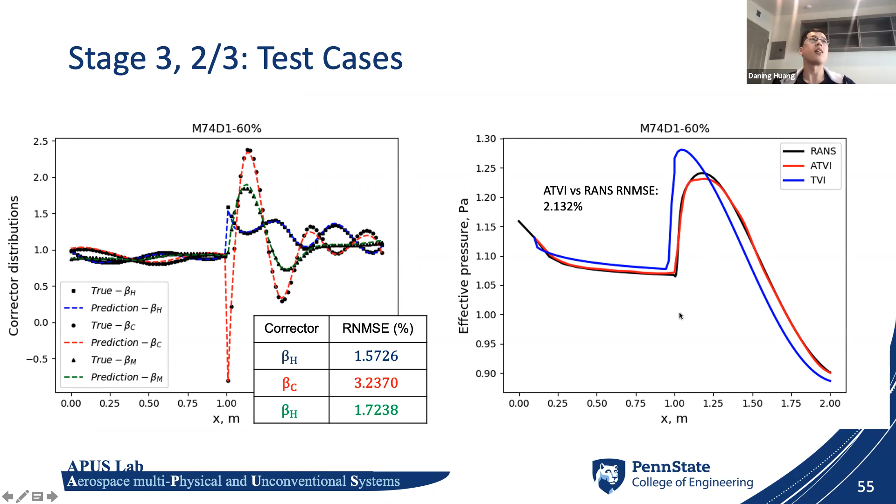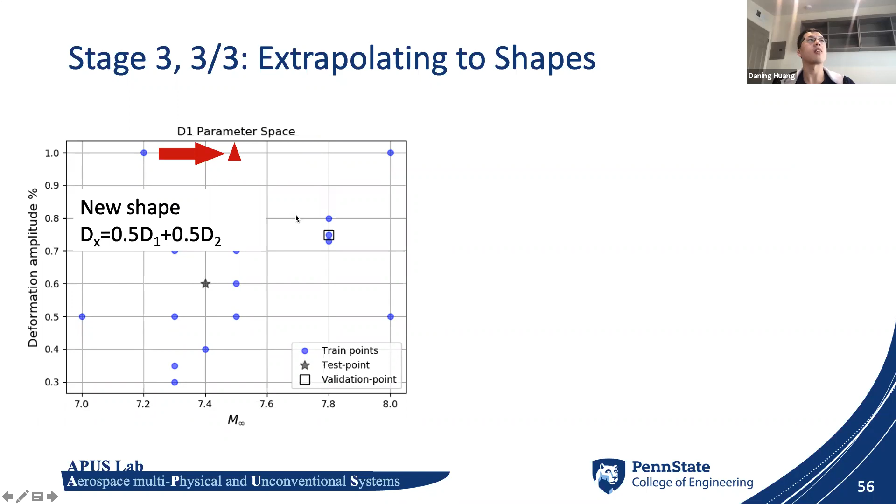Also, just want to mention that the generation and solving of the augmented model still takes only about 90 milliseconds, compared to the real high fidelity solution, which can take hours to days.

So this model, although it's still ongoing and under development, we presented a paper on it at the past SciTech conference. I think it's really promising for the design of hypersonic structures.

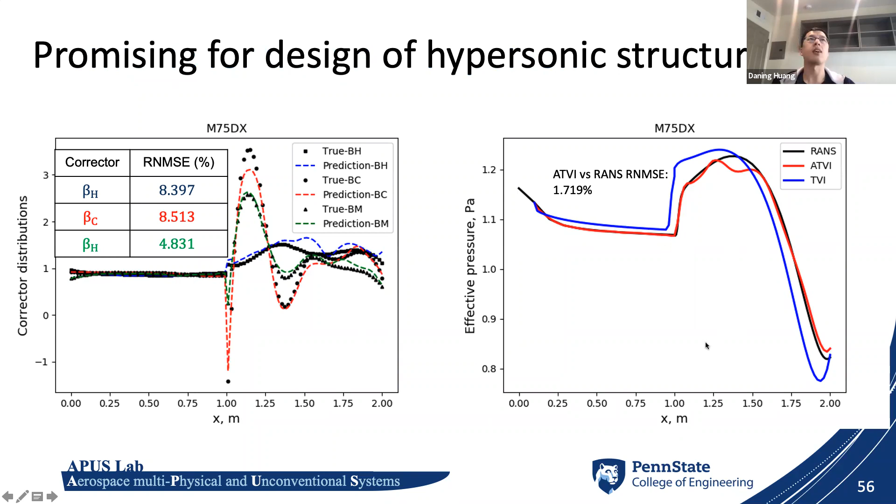For the highlights, in the interest of time, I'll skip these and mention a few other works. I'm not only doing hypersonics — I'm just organizing my work into a kind of story, that's why I've been talking about hypersonics. I've also been doing something else.

I've been collaborating with Dr. Singla on some system identification work. And surprisingly, my model can be directly applied to some problems in rotorcraft noise, where I work with Dr. Brentner, and we have a recent paper going to be published.

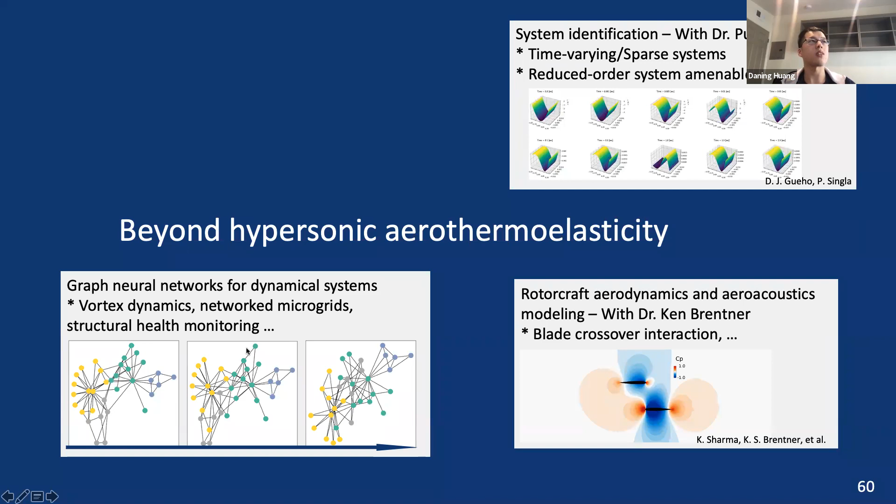I'm also looking into something fancier, trying to use graph neural networks to capture dynamics that exist on a graph. This could be really useful for vortex dynamics, power grids, and structural health monitoring, where we have a sensor network and things like this.

And finally, I'm done. Sorry, I think I'm six minutes over, and that's all. Thank you.

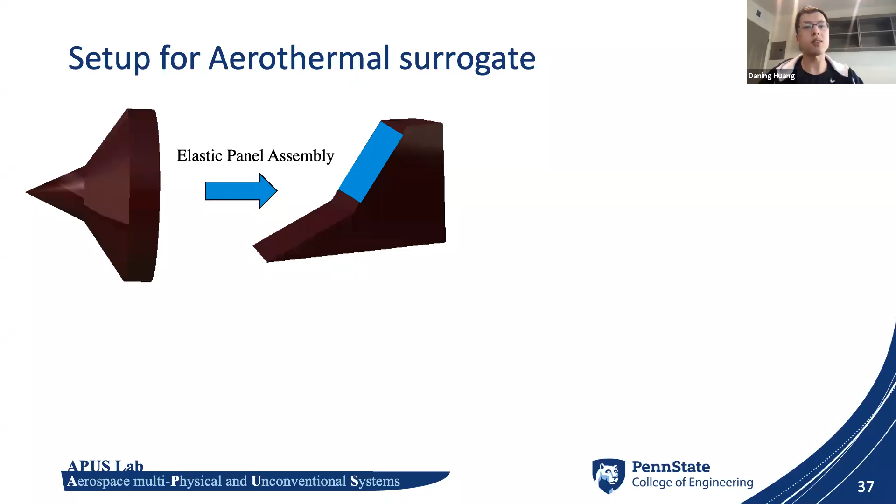So the conventional way is what we do, like the Latin hypercube sampling, which spreads the points over the parameter space without using too many points. Here I'm using a slightly different approach called a low discrepancy sequence — basically a Sobol sequence. It's just a more efficient way to generate these samples.

Furthermore, we can do the sampling more adaptively, especially for the GPRs, because for an unsampled location, once the model is trained, it can predict the uncertainty in the prediction. If the uncertainty is too high, we can go back to the sample generation stage, add more samples there, retrain an improved model, and iterate until the problem converges. Does that answer your question?

Yeah, great, thanks. Okay.

Hi. Hello. Hi, I have another question.

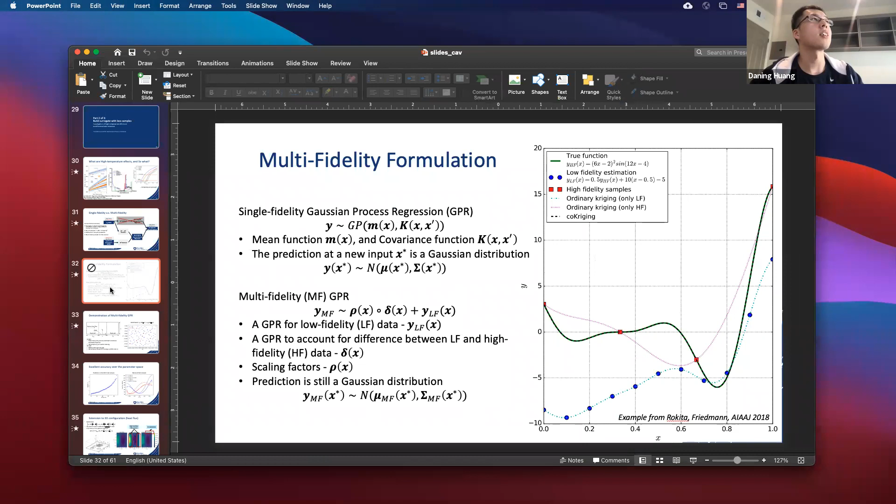Well, let's see, can you see this slide? Yeah, this requires us to dig a little deeper into the formulation. So in this multi-fidelity part, we have the low fidelity model that, as you said, even if we train using this low fidelity sample, it will be very erroneous. And that's why we incorporate a correction term, which I think is what you are getting at.

This accounts for the model error in the low fidelity model. This delta is also a Gaussian process, so when the delta is being trained, it accounts for the existing uncertainty in the low fidelity model. Furthermore, sometimes the error can be a distribution over the parameter space, so we also include a correction factor, or scaling factor, to further enhance the correction for the model error in the low fidelity model.

So the scaling factor is kind of your tuning parameter, which you are trying to optimize, or is the GPR automatically giving you the scaling factor? During training there's actually a Bayesian approach, similar to how the mean function is trained. This rho x, via some Bayesian-like techniques, behaves the same as the mean function, so that way we can have a very rigorous statistical estimate for this correction scaling factor.